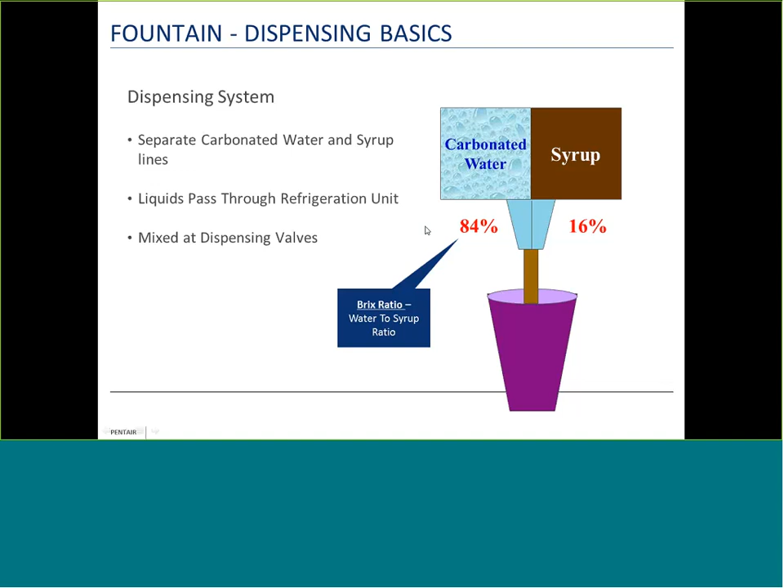Then you have the syrup supply. In this case, it's bag-in-the-box. And then you have the dispenser, where the water and the syrup are mixed into the cup of the customer.

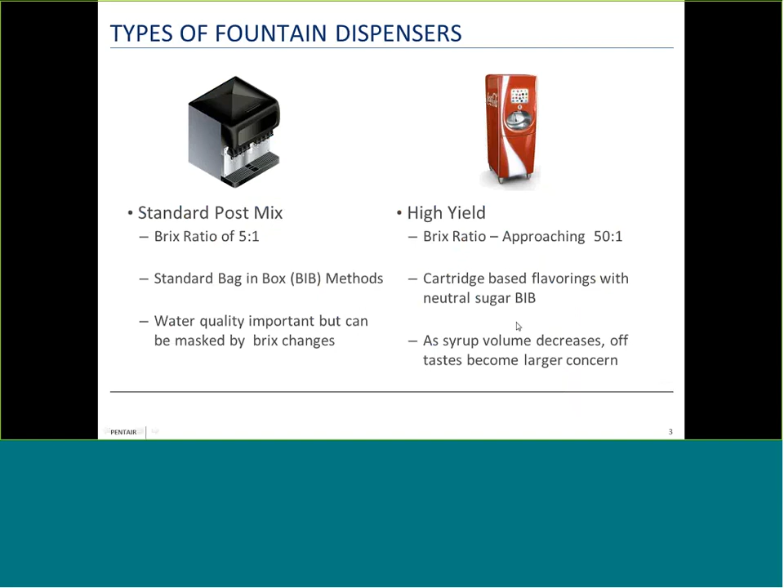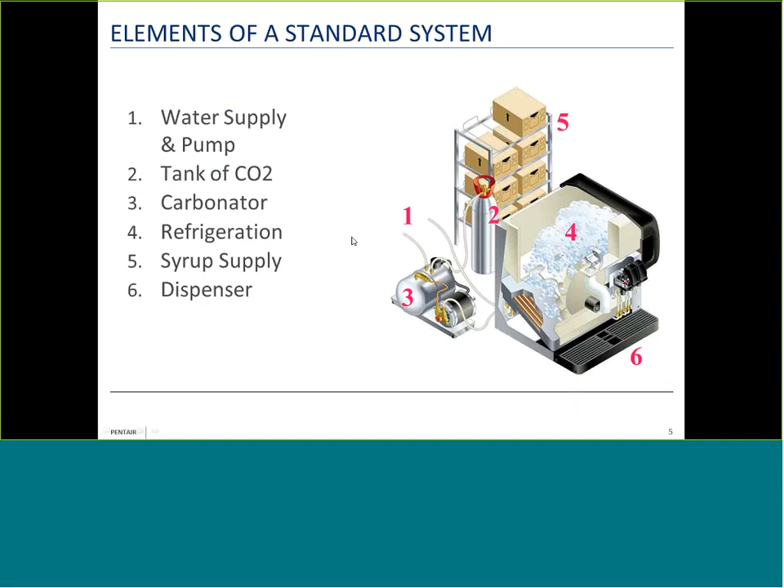Now, carbonation basics. Essentially what you have is the incoming water being sprayed into a mist through an environment or a layer of CO2 gas. This mist picks up and dissolves that CO2 gas, falls down in here, and becomes carbonated with CO2.

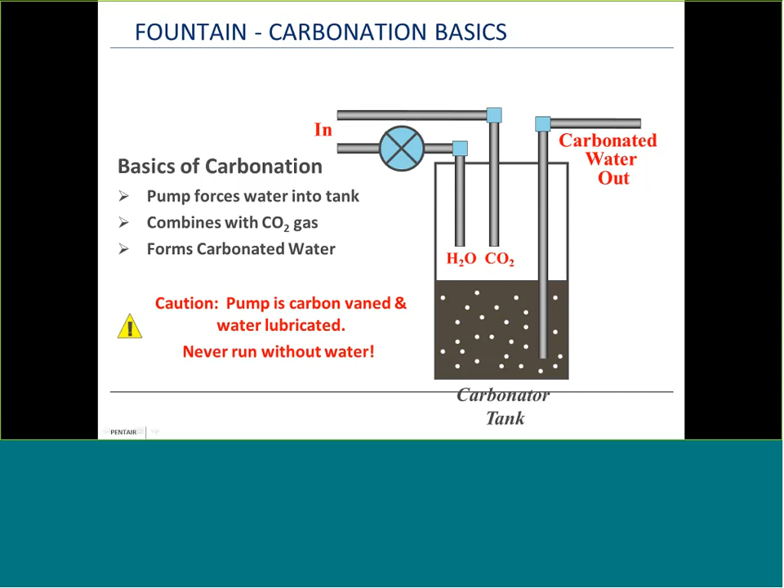Now, the pumps that are associated with carbonators are carbon vaned and water lubricated; they can be broken very, very easily by running those pumps dry. So keeping a consistent flow rate to these pumps is paramount to their life. Have you ever been back of house with a dry carbonator pump running? It creates one heck of a racket and can be easily heard front of house. So the water comes in, sprayed and mixed with CO2, is collected in the bottom of the tank, and then is pumped out via that carbonator pump to the dispense point at the dispenser.

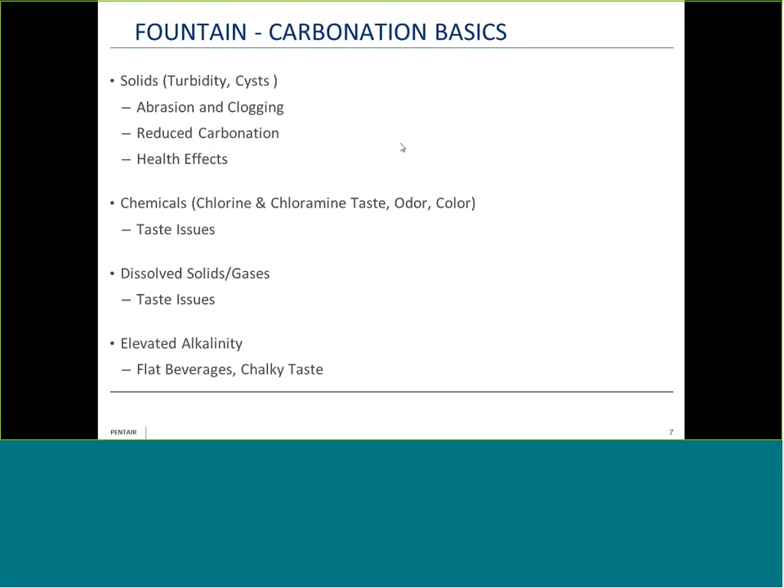Well, how does water impact fountain beverages? Well, we have solids, turbidity, cysts and things like that. Turbidity is going to potentially clog dispense point fine holes, or filters, or even cause abrasion to mechanical wear parts like the vanes of the pump. Turbidity also gives a spot for CO2 to form on and turn back into a gas, so it will reduce carbonation.

You can probably tell the difference easily if you put sparkling water in a brand new clean glass versus one that's been washed in hard water a bunch. The one that's in the hard water, that carbonated sparkling water, is going to have a lot more bubbles clinging to the surface of the glass that has some scale buildup than a perfectly smooth new glass.

And then there's the health effects with turbidity, that there could be possible cysts, bacterial cysts hiding in that cloud of turbidity that would impact health potentially. So you want to remove those with filtration as well.

And then there's chlorine and chloramine removal, and taste, odor, and color are the total organics in the water we want to remove as well, because chlorine and chloramine have significant impact upon fountain beverage taste. And the first place you'll really notice this is in diet beverages. The chlorine and chloramine react with those synthetic sweeteners to produce a rather strong off taste.

And then there's the organics in the water, the taste, odor, and color, that all have significant taste odors associated. If you think of a lake with all the decaying vegetation at the bottom of it breaking down and drawing some of that swampy stuff up into the water supply, that's where we get taste and odor impact from surface water sources.

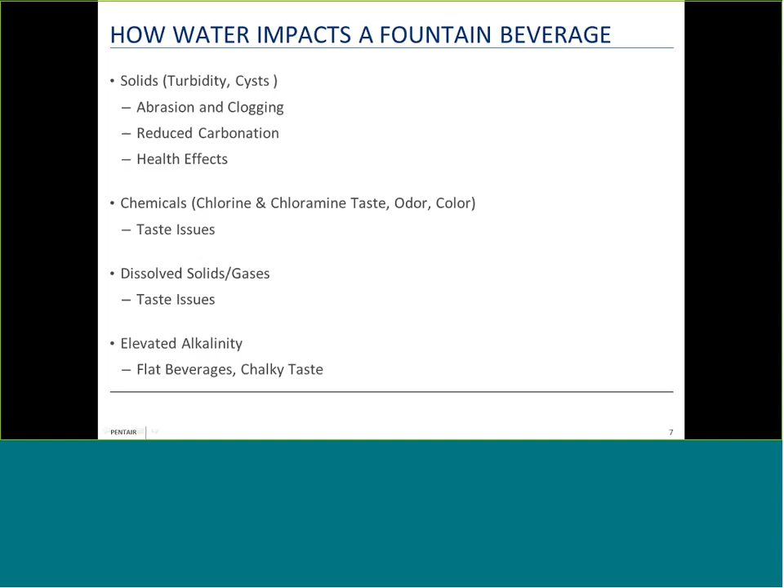because Coke is taking the stance we want chloramine filters everywhere to make sure we cover our bases on whether or not that system uses chlorine or chloramine, and that if there's a change mid-process, it won't impact our product quality. Well, high yield means less syrup, and less syrup means off tastes show up easier. So we really want to make sure we have a high quality water going into our high yield dispense systems.

Typical water quality for fountain beverage is really similar to the Federal Safe Drinking Water Act, except for a couple things. Alkalinity, under 150 parts per million, and this is to facilitate better carbonation and less of an impact of alkalinity on the acidulants and acid flavor components of the

syrups. Turbidity is lower than the federal standard of 1 as well, to keep carbonation up and quality of the taste of the product up as well. And they want the water free of off taste and odor, which essentially means carbon filtration.

Now, Coke Freestyle required use of chloramine filtration. Why? Well, high yield syrups are especially sensitive to off taste. The carbon in chloramine filtration uses a special activation process that creates a significantly larger number of activation sites than standard activated carbon. This allows it to readily remove chloramine, but also gives it greater surface contact with potential taste and odor compounds as well, removing them more efficiently.

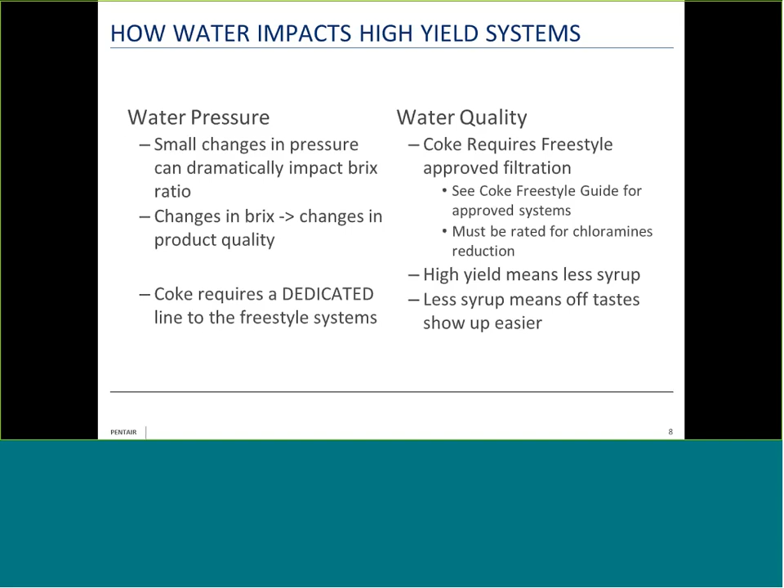And chloramines react differently with cartridge-based flavors than chlorine, and you'll really see a strong impact in your diet beverages first. So if you walk in and someone's mentioned they've got beverage issues, taste the diet and see how off that is compared to what you would expect. Those taste and odor issues will show up along with the Brix ratio issues very quickly based on those synthetic sweeteners.

It requires a dedicated water line. No combination filtration systems are allowed here. No high flow CSRs. You'd have to have a dedicated filtration system just for the freestyle. Why? High yield beverages have high Brix ratios. We want to maintain consistent, even water flow and pressure to these units.

So we don't want that experience of taking a hot shower and somebody flushing the toilet and all the cold water going away and that pressure drop. Well, that pressure drop in this case is our carbonated water, and the hot water we get scalded with is the Brix ratio. You suddenly get a massive increase in one over the other because that cold water is pulled off in another direction. That same sort of impact happens to beverage equipment. When you have that pressure drop in the system and you pull water away from it, your ratio drastically changes.

Now, filtration technologies that we use for fountain beverage. We use the MC and the XC filters in municipal water with water specs within range, and it's municipal sanitized water. They remove taste and odor compounds and ensure optimal performance and taste of that system. They're half micron, persistent bacteria protection, and it's a pre-coat, NSF certified 42 and 53, and up to 48,000 gallons in a quad.

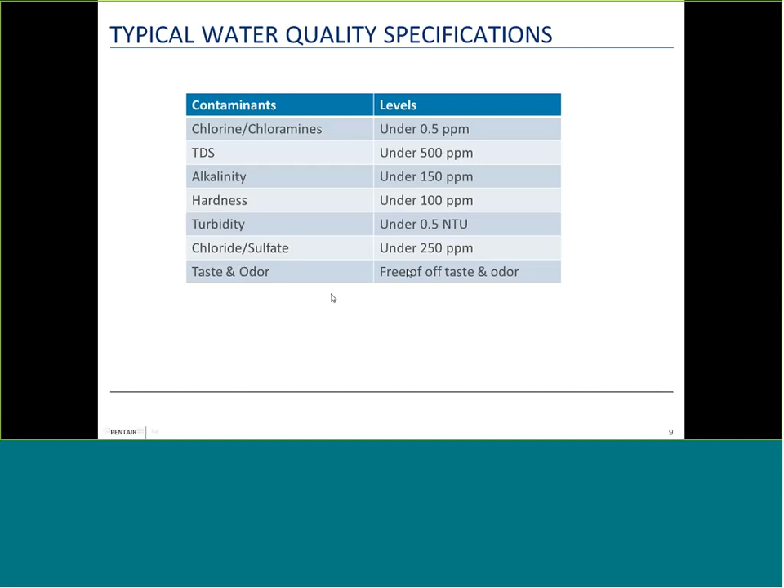Well, the FC series is for the same sort of water that we're dealing with for the MC and XC2s, which is acceptable water quality for fountain beverage and from a municipal sanitized source. They remove the same sort of contaminants as the MC and XC2 do, but they're more for high capacity or high volume needs. Because of the Fibredyne technology, we're able to get much bigger flow rates and much larger capacities. Half micron ratings, NSF 42 and 53, just like the MCs, but up to 100,000 gallons and a significant increase in flow rate over the quad systems.

Then we have chloramine reduction filters to match to the Coke Freestyle systems. We have the 7CLM+, which is specifically designed for chloramine removal being present. With a Coke Freestyle, this is mandated whether it's chloramine or chlorine. And it is excellent at removing off-taste, odors and chloramine from that system. It's a quick change filter, half micron, NSF certified, up to 32,000 gallons.

Then we have the bowl drop-in style filter series of the CB20 systems. These are for mineral content within beverage quality, but for chloramine removal specifically. Same sort of performance as the 7CLM, but for high capacity needs. It's a drop-in technology, half micron, NSF certified, and up to 85,000 gallons in a quad.

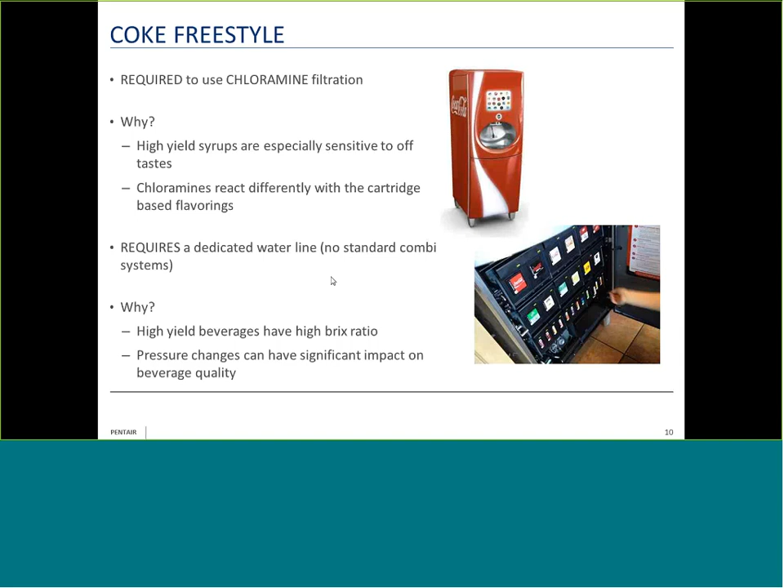Now, for combination systems for fountain beverage, for especially high capacity and high peak flow rates, we're looking at the Endurance systems. It's for mineral content within proper ranges and disinfectant present, but with high dirt load or high volume use. We may have a small amount of dirt in that water, but the amount of water that establishment may use in 6 months to a year is so heavy that the dirt builds up quickly just through volume of use. These systems are up to 200,000 gallon capacity in a quad and up to 15 gallons per minute peak flow rate.

NSF 42 and 53, and it's a true combination system. You can have fountain on one port, and ice, coffee, tea, and other applications on the SRX phosphate feed system. Please note that a Coke Freestyle would have to have its own separate system. We could not use this for a Coke Freestyle.

And if you have an existing system already in the wall, we offer the ability to upgrade that existing twin, triple, or quad manifold to the Endurance kit, going from the standard cartridge life up to the potential 200,000 gallon capacity with higher flow rate. This kit just allows us to swap out the filters, install a 2SRBW feeder, and the pre-treatment before these filters.

We have a manifold that's specifically designed around Coke Freestyle issues for a smaller package that delivers not only the chloramine filtration, but also ice filtration as well, with 2 dedicated lines. So we have a dual inlet, dual outlet. That's what DO stands for, dual inlet outlet manifold. And this is for pressure sensitive applications like Coke Freestyle, where we have 2 separate water lines brought in and 2 separate lines brought out.

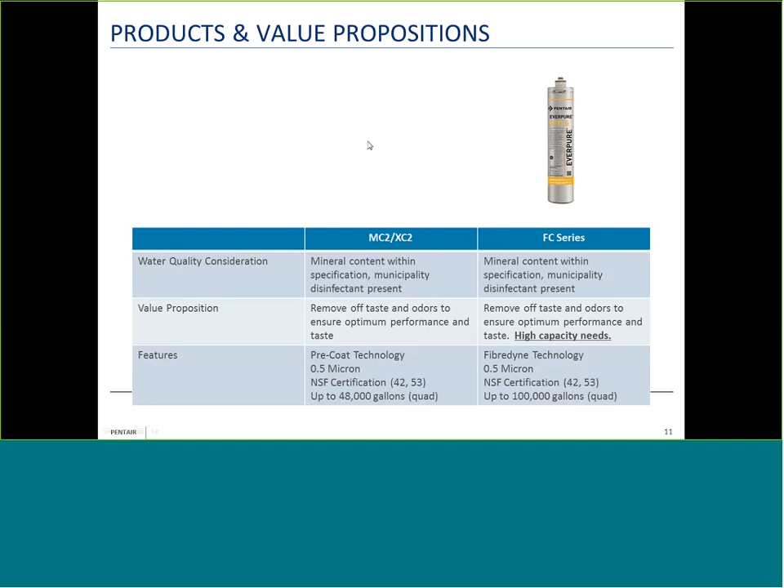The back one will hold 3 7CLM plus cartridges for the Coke Freestyle, and then the front 2 will hold a choice of ice filtration cartridges, whether those are I2000s, 4000s, 7FC5s, 7FC-Ss, or even 7SIs feeding the ice maker. So when one unit kicks in, it's not stealing water from the other portion of the filtration system.

And also the manifold is available by itself, so you can use it in other applications if you had pressure sensitive issues or you just wanted 2 water qualities that you could change out separately, but in a small compact manifold.

So sizing filters for fountains. We need to answer 7 questions here. Is this a high yield or standard fountain system? Coke Freestyle versus standard bag-in-the-box. How many carbonators are there? Because a carbonator requires a minimum flow rate of 1.67 gallons per minute. If you've noticed, that number shows up on our flow rate with our MC and our XC cartridges. That wasn't by accident. Those filters were designed around this application. How many carbonators there are is going to determine what peak flow rate you need.

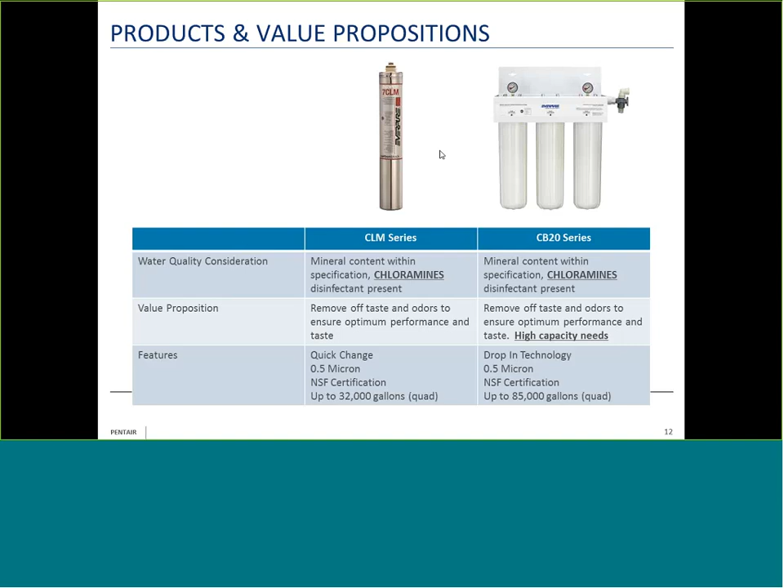Now, do you have low dynamic pressure, below 50 psi, in the building? That is going to determine whether or not we need a water boost to maintain that consistent water pressure and flow through the filters to our fountain dispensers, because that greatly impacts profitability. So dynamic pressure is when a tap is opened and running. What pressure do you have there? Do we have a non-carb pump that we have to satisfy? For non-carbonated beverages like lemonade and iced tea or fruit punches, those sorts of things.

And how many bag-in-boxes do they go through per month? This is going to help us understand capacity. If we think about a bag-in-box of syrup and we're putting in 5 times the amount of water, if we have 100 gallons of BIB that they go through in a month, they're going to go through 5 times that in water, so they would be going through 500 gallons of water. So you need to size the system appropriately to how much water is being used.

And is there other water-using equipment that can benefit from a combination system? Remember, if there's a Coke Freestyle, it must have a dedicated line. But if you're dealing with standard BIB, can you use a combination system to handle the iced coffee and tea in the location as well, giving them more value than just fountain filtration?

And the last thing, is the plumbing adequate to feed peak flow demand? So we want to match the line size coming in at 3/4 to the line size going out. And we can reduce that line size afterwards if it meets flow demand of the building. If not, let's maintain that 3/4 in and out until we break down to the trunk lines and pieces of equipment.